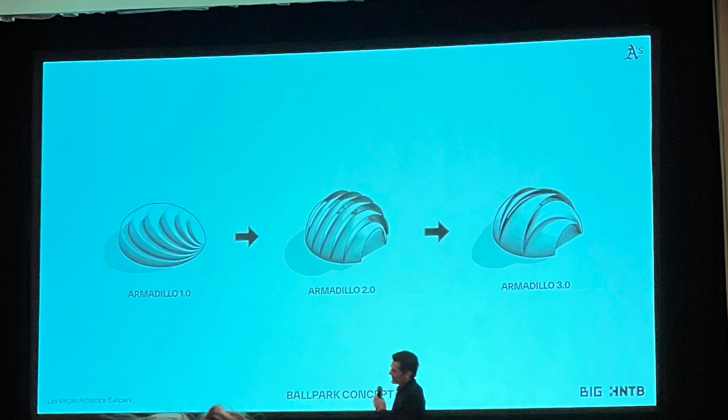Same thing with the one in the middle, and then eventually you got to the form on the right. And the reason that we got to that last form is we wanted to also provide some context for baseball. We wanted to make this feel like it's connected to the sport, to the history of the team. And so, of course, one of the most iconic images in baseball is the pennant. That's synonymous with success in baseball. So we thought if we could incorporate the pennant into the design, we were really onto something.

There's also a painting that we were very much inspired by, which was done by Lucio Fontana, where the painting itself is really more about the cuts in the piece of paper as opposed to the painting as a whole. So when you look at the three-dimensional object at the ballpark, you'll notice that those clerestories come down and actually meet at ground level. So it's really almost a slit in a dome as opposed to these separate pieces. So that was something that we also felt very strongly about and got excited about in the design.

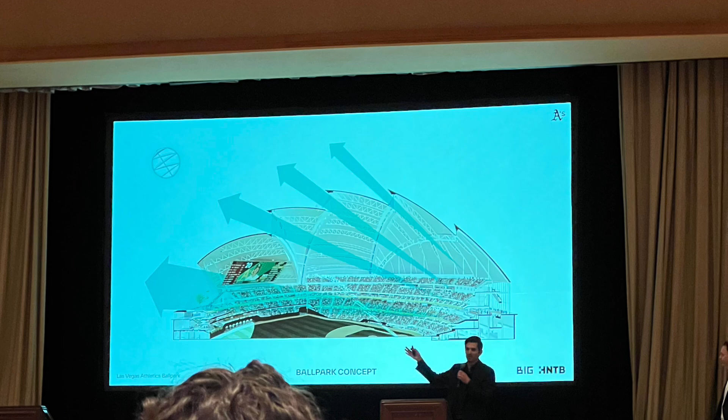Once we had that basic form, there was a lot of fighting to make this efficient: efficient structure, efficient for material usage, efficient at protecting from the sun. So there was a real form-finding exercise, trying to get this thing to a point that made sense for exactly how we wanted the final ballpark. And eventually it turned into what you guys have probably already seen.

So this is one of the images as you would drive up from Las Vegas Boulevard and see it sitting on the site there. And I hope what you'll notice is that original sketch that we did is still very true to the final form of the ballpark. So you'll be able to see out a giant cable net glass wall towards the Las Vegas Strip. You'll have clerestories looking up to the sky, and you'll be protected from the elements, creating a really spectacular experience for everyone that's playing there, working there, or visiting for an event.

So this is just a view of that cable net and one of our favorite features. And I think I'm going to turn it over to Brian to talk about some of the details inside as well.

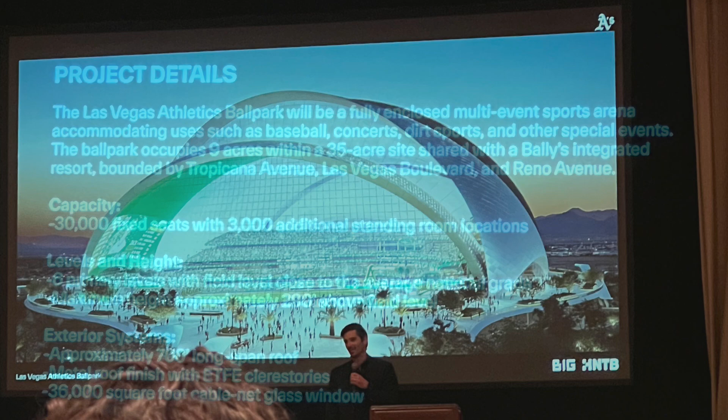All right, so just a couple of quick things. In terms of the site, the ballpark itself is a 9-acre circle. That's the footprint on the site. There'll be a future integrated resort by Bally's that will share the site. So that integration is still being developed right now. The ballpark is moving forward at a very fast pace. We're very excited about that. 30,000 seats with 3,000 standing room to increase the capacity. We've got 6 primary levels, and I'll walk through those at a high level.

Stu, go to the next slide. We are approximately a 750-foot long span roof structure, and as Frankie said, it's formed of 5 major pennants coming across the roof with ETFE clerestories, similar to the Allegiant roof, occupying the vertical components. That's really intended to make this ballpark feel as open as possible. We don't have any operable roof elements. This is a fully enclosed conditioned building, but that's going to really bring in natural light.

From the spectator view, you're looking out through the large cable net window and through these ETFE windows. You're getting a lot of natural light, a lot of view, a semi-open condition. The cable net window, which you can see on the section on the left, is just under 40,000, around 36,000 square feet. Currently, that's a conventional cable net window system, but the form is interesting. It's a double curvature form, which gives it some strength and some unique geometry as you enter the building. The entire seating will have this amazing view out into the Las Vegas Strip.

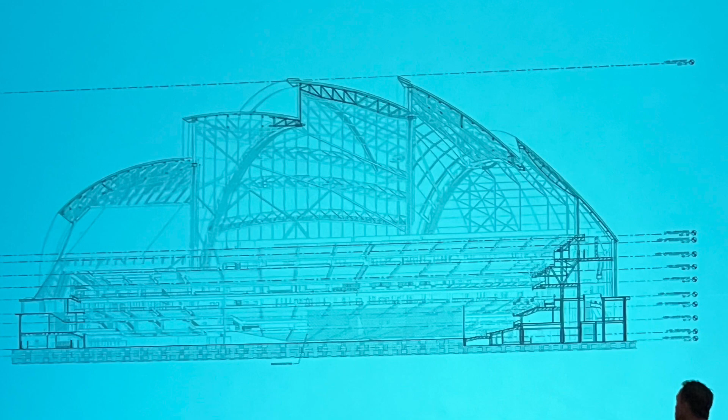You can see here on the section on the left, this is our typical section. We really try to limit vomitories and have more of an open concourse feel so that all of the concourses are connected to the activity and energy happening within the stadium. There's effectively, and we'll walk through each one of the plans, 6 levels.

Maybe we can go to, this is the event level here. This is field level, which is at grade for the project. We're basically a podium that you can see on the left-hand side here, just under about 40 feet. The future integrated resort will connect at that level, and that will be our main concourse level. So the first 40 feet will eventually be covered by that resort.

The event level is largely team spaces, which you can see in the green, home team on the left side and visitor team on the right. We have a lot of different unique opportunities and spaces within here, the premium spaces. You can see them colored in tan here. This is the lower suite.

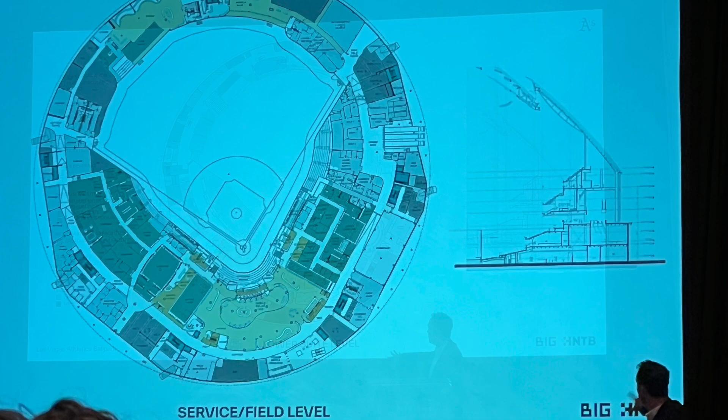We'll have a primary entry on the south side of the site; approximately 30% of the fans will come in through this entry to the lower suite and then circulate up throughout to find their seats. The primary entry on the next floor is to the north. And you can see that we've got a series of bathrooms and concessions and other fan amenities that are all on the outside of the ballpark, really just, again, providing that open concourse feeling and that connectivity to all the events happening.

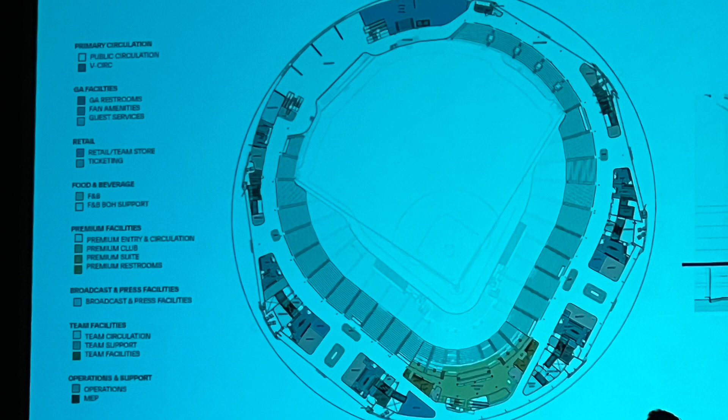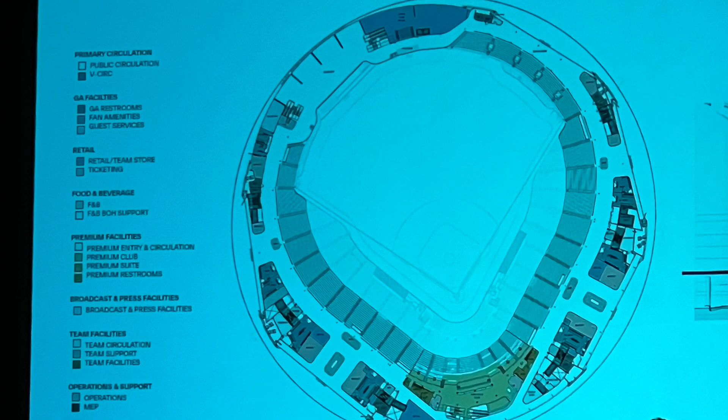We've got a series of bouncing arches, which are glass elements on the perimeter here, so you can always, from the main concourse, have this connectivity outside to views to the south of the airport, views to the Strip, and views to future development that will wrap around the project. As you go up, you can see here, this is our upper suite. We're on our fourth level here.

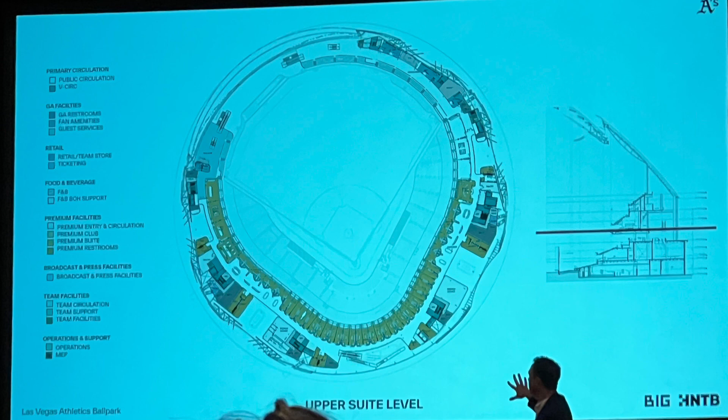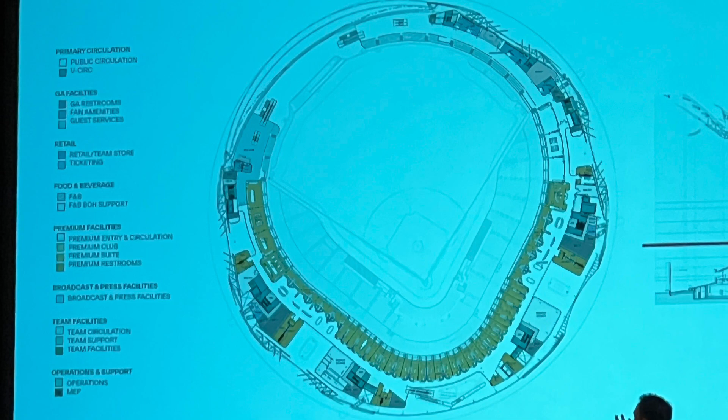We'll wrap around here primarily a suite level, and you can start to see on the north side, we've got the cable net window to the north where the concourse starts to drop away. You can start to see how big that window is and how that connectivity is shown. This is the upper concourse here. Again, fully rear-fed concourse with amenities and bathrooms and food and beverage services to the outside.

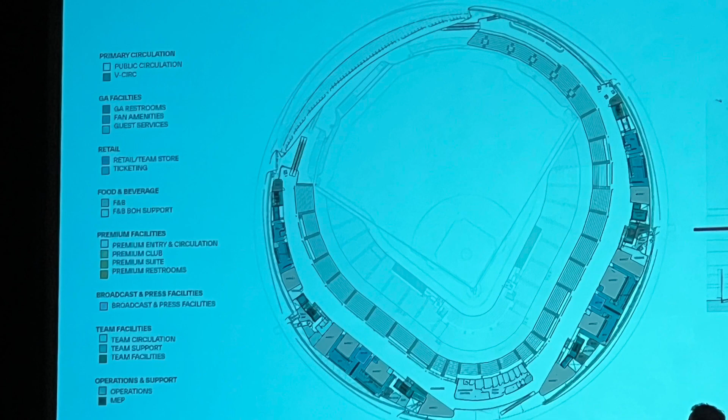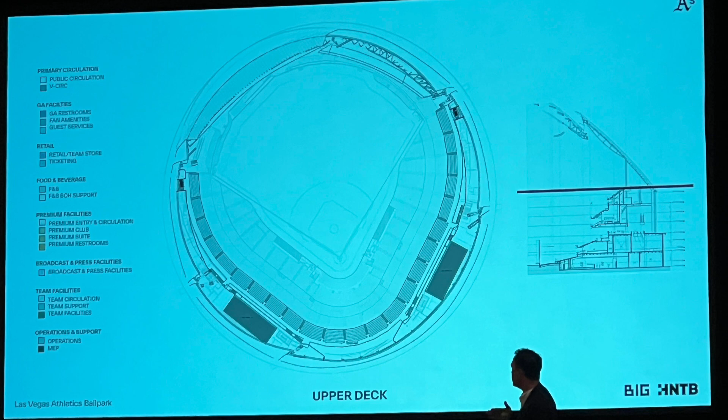And then we have a small deck on the next level, which is similar to a kind of vomitory concept, except the stair circulation is to the backside. So, again, we're preserving that full open concourse with view to the field level.

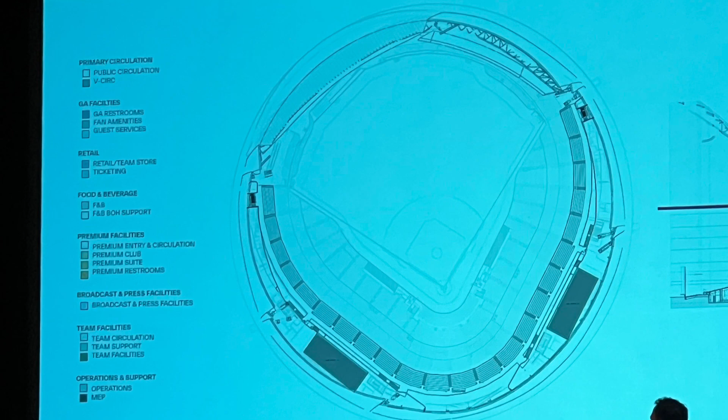So, before I get into the program, I want to tell everybody a quick story. As I was leaving my house this morning, I was kissing my 3-year-old daughter and told her, hey, Daddy's got to talk to a lot of people today. You want to wish me good luck? And she turns and looks at me and she says, don't fall. So all I could think of as I was walking up here is don't fall down. So mission accomplished.

So, a little bit about Mortenson. Mortenson's been in business for 70 years, so not a new kid on the block at all. And they have over 30 years' worth of sports complex building. They've been known as an industry-leading sports builder year over year. And they do that by having a dedicated sports group of 20 professionals that solely work on sports complexes all over the nation. I'm going to give you a few of those examples here.

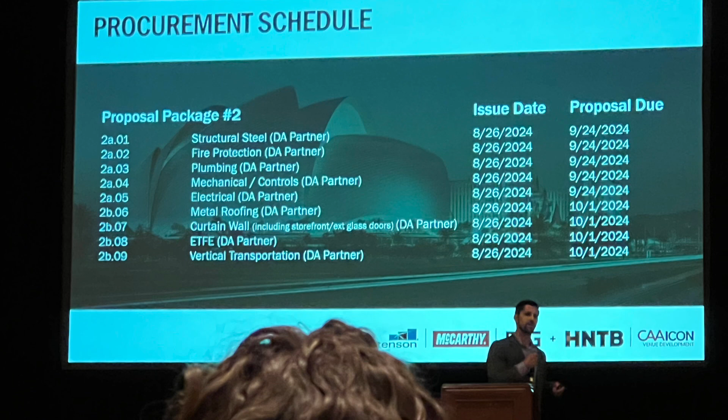So Dave already hit on this earlier. The high-level schedule will be breaking ground in Q2 of 25 with the project completion in 2028. So I'm going to walk you through just some of the procurement dates, what's going to be included in each package. So if you want to get your phone out, I'll try to stay on each slide for just a second so you can see what's in the packages.

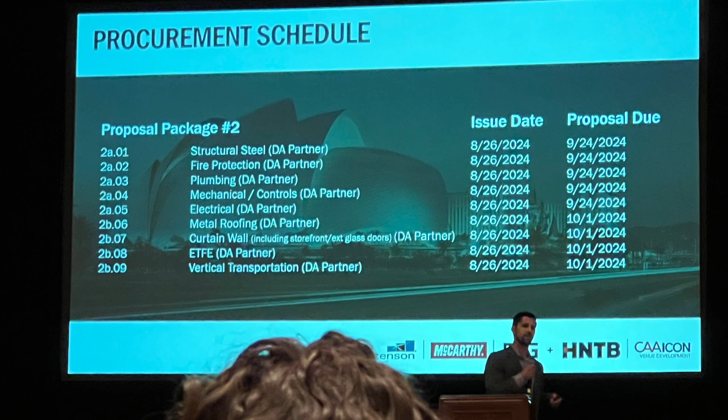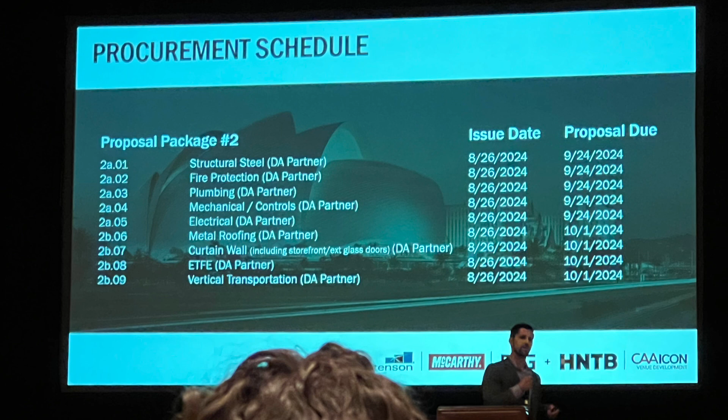We're not starting with two because we don't like one. One's already been solicited and awarded. So one was for the design assist CableNet package. As you can imagine, that system is pretty complex, so we need to get those folks on board early. But this package 2 is out on the street right now. It's primarily the remainder of our design assist phase. So it's steel, MEPs, the building enclosure, as well as vertical transportation. And those submissions will be due here in the next handful of weeks.

Bid package 3 is going to be precast, masonry, video boards, and low voltage, and that should be coming out sometime in the middle of October, so we're going to get a little more than a month. Bid package 4 and 5 are going to be coming out concurrently, currently targeted at mid-February release. So bid package 4 goes civil utilities package, deep foundations and concrete. And then package 5 is going to be the remainder of the core and shell overall package.